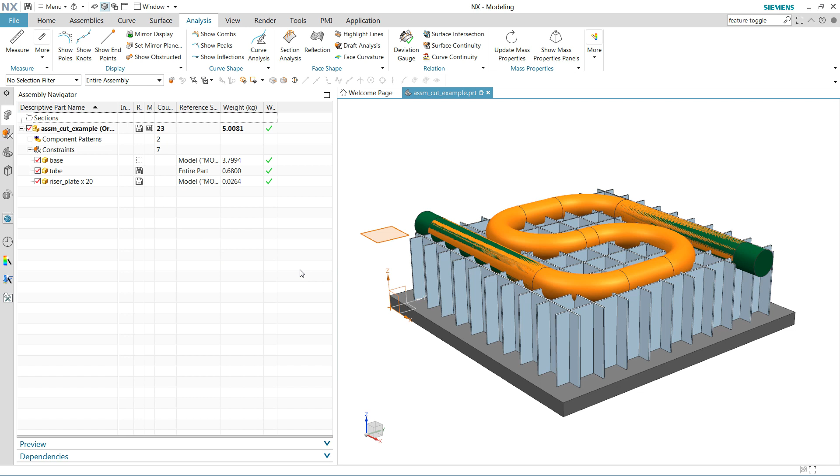So right now there are no operations in the assembly, as you can see here. The tube itself, this 0.68, is just this brass tube right here. If I do the entire part, there's another green tool body here that's a solid tube that we're going to use to do the actual assembly cut operation.

So in this assembly, if we hide the tube for a minute, you see all of these riser plates are uniform height right now. Again, these are going to be very bumpy in a minute as we subtract away the tube. So here as we do this, you see all of our weights are up to date. Our weight status here shows okay for all of these. These are all set to update on save right now, and so these are all the current ones.

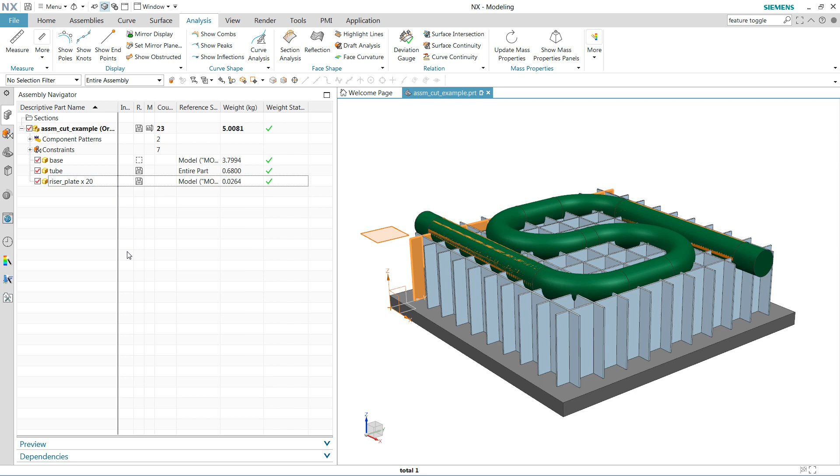So this 5.0081 is a simple sum of these down below. And again, the riser plates, these are identical riser plates right now. If we unpack this, there are 20 of those that each have that same mass, right? So those are being summed up right there. So let's go do the assembly cut operation. We'll come do an assembly cut here.

The target here, we're really going all 20 of those riser bodies. So we'll select all of these guys, not the tubes here. We'll get rid of those. So we have 20 targets. That's the right number. The tool here, we'll use that green tool, subtract that green tool. We'll hide that when we're done.

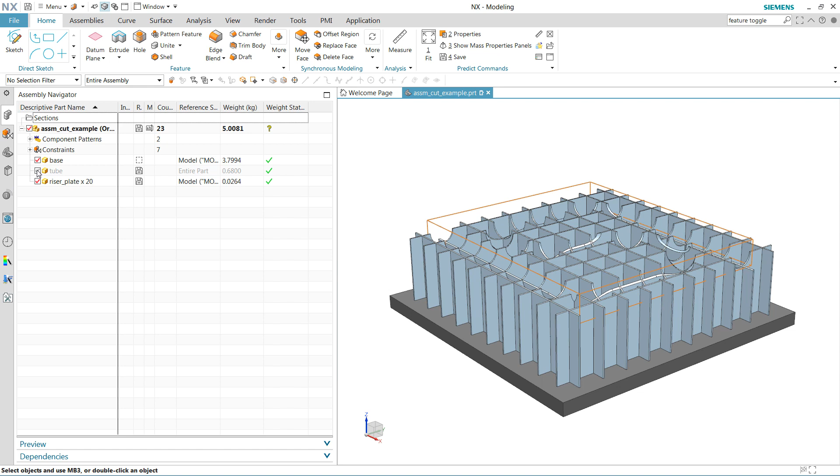And as we do that, it's going to, again, subtract away the tops of a whole bunch of those risers, which leaves us in this kind of state here, where we've got, again, a groove in place now that tube can go through. Okay, now mass properties wise, what's going on? We've still got these same 20 riser plates, the original riser plates.

Of course, if we go to any of these and look at these in window, we'll see that the original riser plates are not modified here. They're only modified in the context of the assembly. The tube also is not modified. Its mass is the same, so it's unchanged here. The base is unmodified, so it's fine there, but the assembly, of course, has changed.

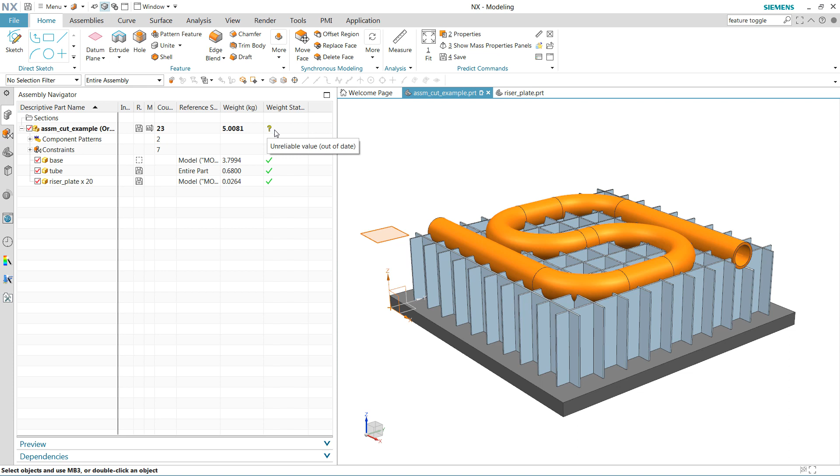So its weight status right now is set to unreliable or out of date. We need to recalculate it, right? The easiest way to do that is to hit save here, and that'll update the mass on save, and now we see we have a slightly reduced, now 4.9771 mass. That is our assembly mass.

Now, with the new tools, we can do a few things. As we come to look at these, we can start to show a mass property panel. If we wanted to see the contribution, for instance, in the old tools of just the assembly, we could come to the properties here. We could look at, say, the mass tab, and we could see here now this negative number, this negative 0.031, that is the mass that's removed by that cut at the assembly level there, for instance.

And you had to know where to look for that, right? And you had to MB3 and get into the properties panel to see that. With the new tools here, we can turn on the mass properties panel, and it's going to start to add this mass properties panel below in the assembly navigator here, right?

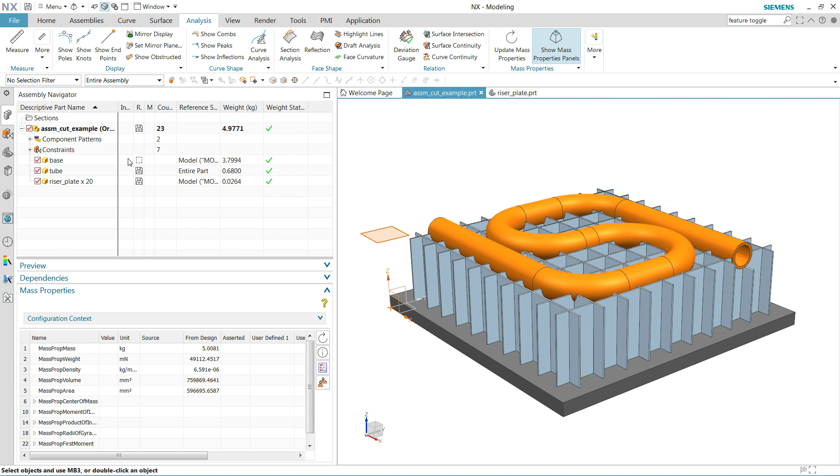As we come and select something in here, we can see what we're selecting. We're selecting this assembly, including 23 components. We can see that the mass is up to date. The weight is up to date for this particular one. If it's not, we have an update button right here that we can use to do that. We can see that assembly weight here, this 4.9771.

For each of these, if we select them, we can see not just the mass, but also all of the mass properties down here for each of these components. These were much harder to get to before in the past. Again, we could see the mass only in the properties panel, but if we wanted to look at densities or volumes or areas or things like that, those were much harder to get to before.

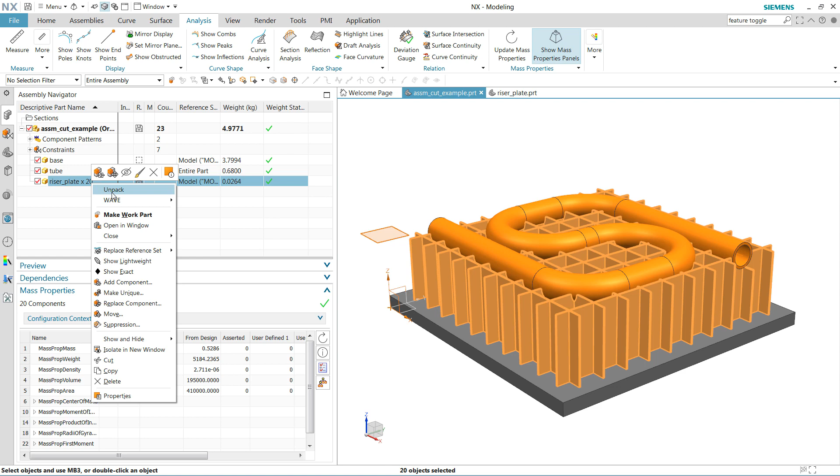The riser plate here, again, we'll see with all 20 of them selected here, we can see the cumulative mass of those all together. If we want to unpack these and look at just one of them, we can see the properties of just one. So that's pretty nice. And if we're looking at the assembly, we can see that rolled up mass by default.

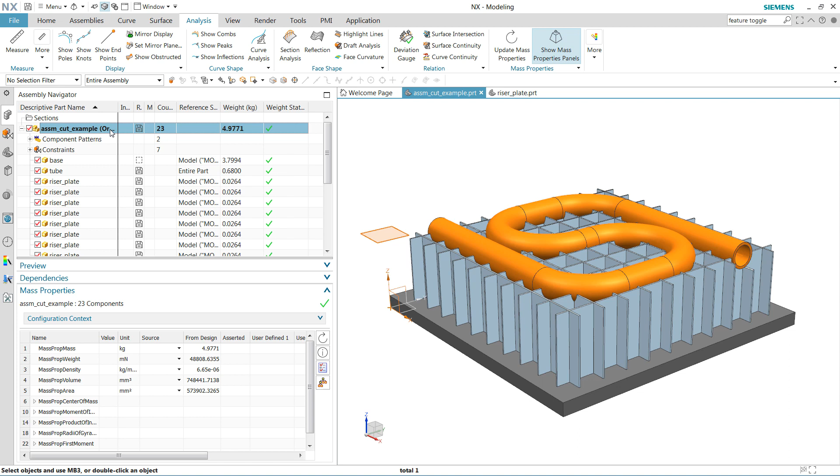If we want to see that individual assembly contribution, in this case where we know that we've removed some material, there's a little button over here to see just the assembly only. That'll show us just the assembly contribution here. Again, it'll tell us right here that it's showing us only the assembly contribution in this case, which is that negative mass, or that removal of mass from this particular part. Clicking the assembly again will bring us back to the rolled up values.